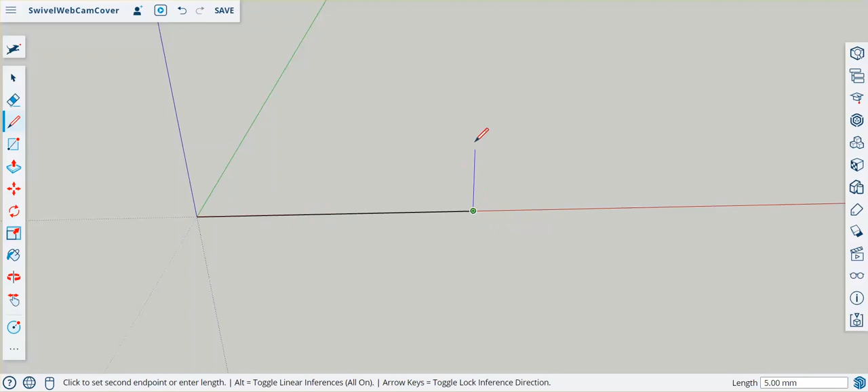We're going to need this today, the fractions of a millimeter. First of all, I'm going to draw a 20 millimeter line on the red axis. I'm then going to go to the green axis, and I'm going to go 10 millimeters that way, come back 20 and back there. So I've got a 20 by 10 rectangle.

Right, half of this rectangle is going to be the swivel I'm going to create. Now I've halved the rectangle into two squares. This first square needs to be raised, and I'm going to raise it up 0.5 of a millimeter, so half a millimeter.

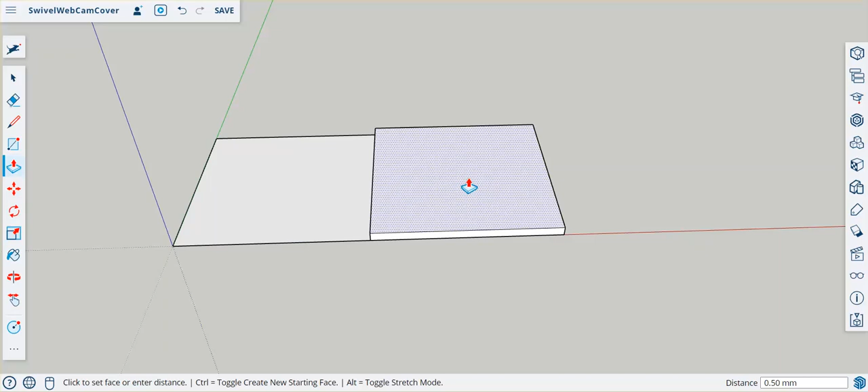Now on top of that half millimeter, we're just going to ignore this side for the moment. On this half millimeter here, we're going to raise a circle. So I need to draw a circle, or raise a column basically. Going to draw across there, go get my circle. Remember, if circle's not showing, look inside the tools.

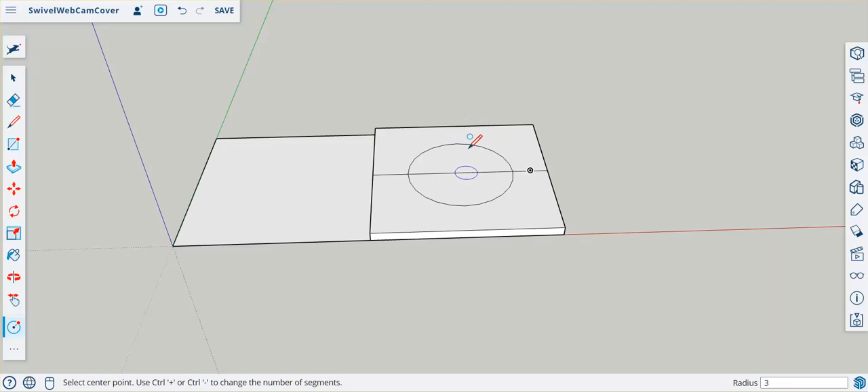Midpoint, circle to the edge is 5 millimeters. I want to have 3 millimeters here. So this is going to be the center of my hinge, and this part's going to revolve around that hinge. I need to use the rubber to rub these parts out.

We're now going to bring this up another, or to the top really, which is going to be about 1.5 millimeters. So let's raise this 1.5. So now from half a millimeter, 1.5, I've got 2 millimeter height to my webcam cover.

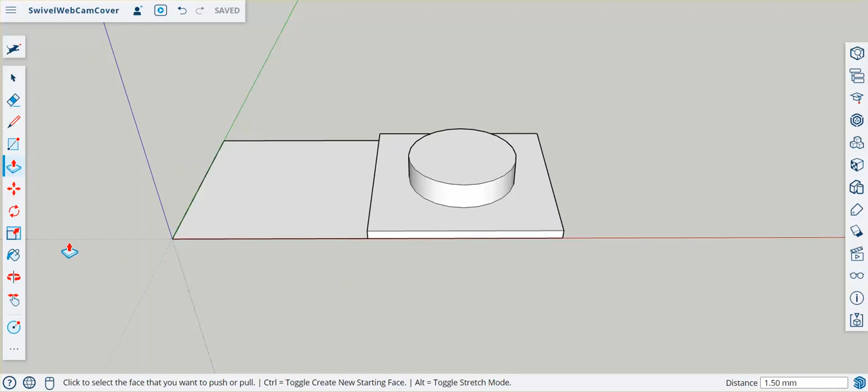The next thing I need is I need the top to be wider. So basically, we're going to use offset, and we'll create some air gaps. We're looking at 0.4 of a millimeter as an air gap, and that's because the printer extruder extrudes at 0.4. Let me just get offset on while I'm telling you this. I'm going to go to offset. What offset does is it lets me take an offset from an edge. So I need a 0.4, just type that in, offset.

That's the same width as the nozzle on your printer probably. If your printer nozzle is 0.3, then it'll be 0.3 there. If it's a 0.5, 0.5, but standard nozzles are 0.4. So that will allow a gap so the extruder won't stick to the edges too much. It'll be a little bit sticky, you'll have to crack it open, but it'll be okay.

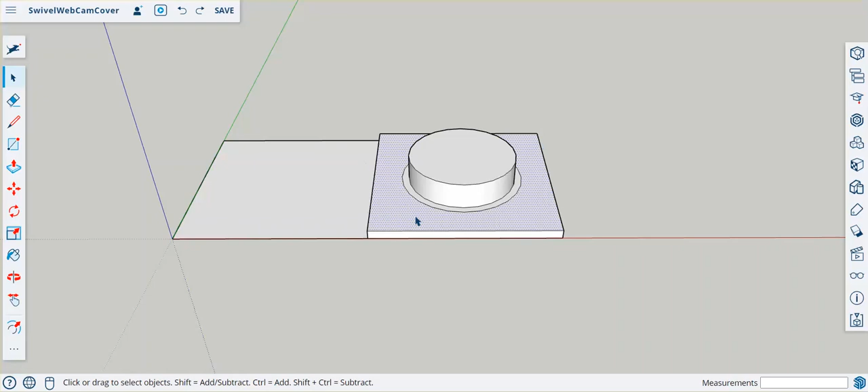So now this air gap is going to flow around. So the base piece here is going to be within that air gap in a minute. Now this at the moment is touching that air gap, so we're going to be a bit sneaky. Oh, that's not it, let's press escape. If you click something and it starts doing something, if you press undo, Control Z, or escape, it'll stop doing it. I want to highlight that, Control C copy, Control V paste, and take it over there.

Just put it over there for a minute. I need to create an air gap now of 0.3 here. So what I'm going to do is take a line, draw a line up on the blue axis, let go of everything. I said 0.3, I meant 0.4. I've now got 0.4 mil there. Press escape, gets rid of the line.

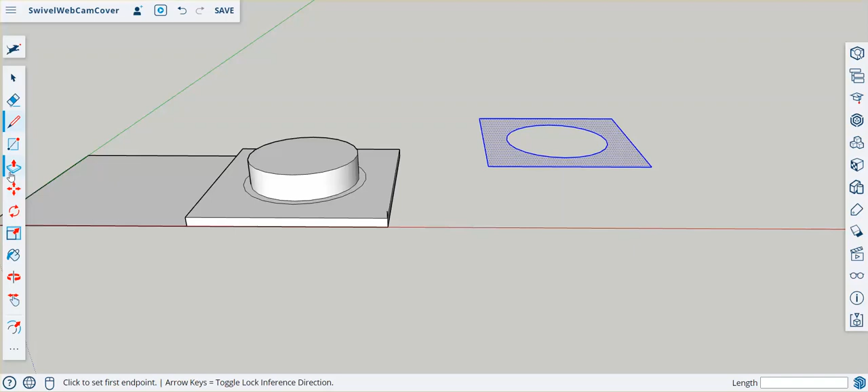I want to put that into that air gap there. So here we go, I'm going to move tool, take this corner, and put it there. I've now got an air gap of 0.4 because of that line I drew. It's going to take the line out. Just be careful doing that, we don't want to lose it.

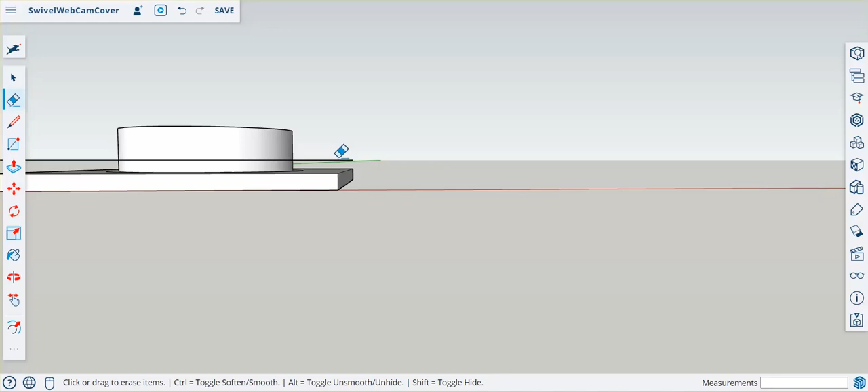And now we're going to look at raising this to create that hinge. Now at the moment I'm at 0.4, so I can take this up a millimeter. Well, actually I'll take it up level to the top because we can sort the top out in a second. I did that by just hovering over the face, so it will take it level with that face. So that's now level in there.

Now I need another offset because I need this bit to overlap, or this is just going to fall off, isn't it? So let's create another circle. That's why we started with 3 mil.

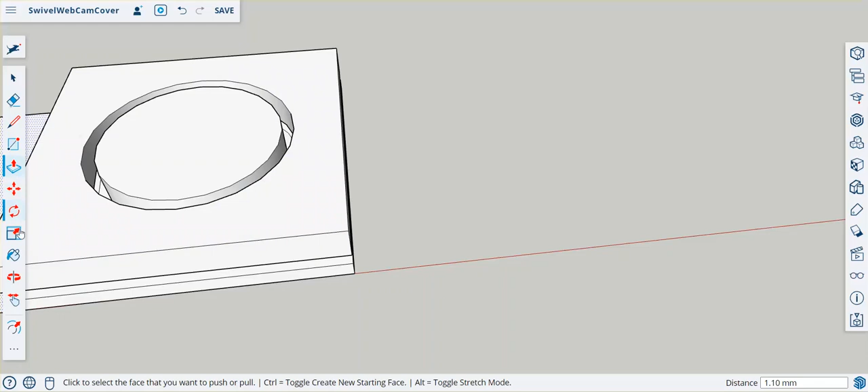So let's go to our offset again, and you can see how powerful offset is here. Let me do it from this point to make it easier. So offset to there is 1.59. I'm just going to have an offset of 1, so that's going to leave me some space around the edge.

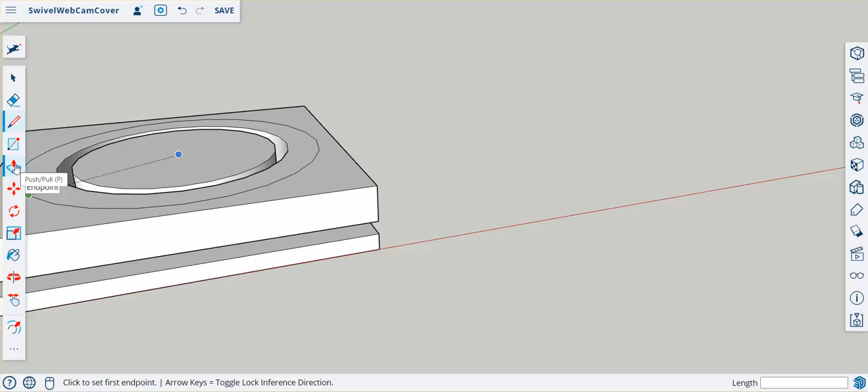And then with my pencil, let's measure the thickness. I should have a thickness here of 1.10. So I'm going to take this down 0.5, but with an extra bit of air gap, so I'm going to take it down 0.9 - that's 5 plus the 0.4 air gap.

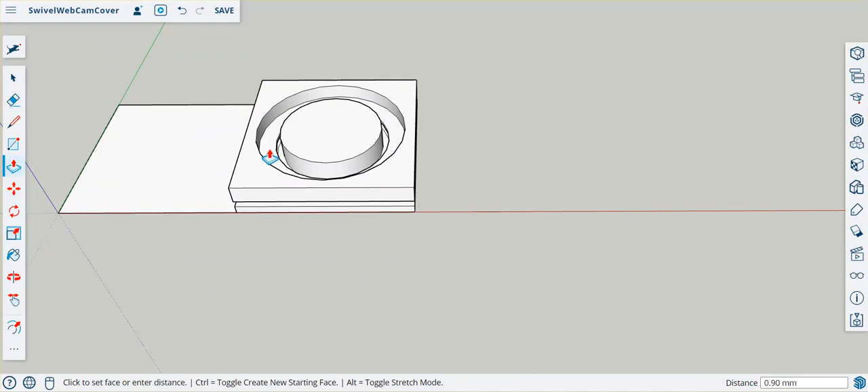Pull down 0.9, enter. I'm just going to hide a side now just to look inside. You don't need to do this, but if I just do hide, you can see there's still quite a lot of model in there, so there'll be enough thickness to hold this together. Back to the glasses, unhide all.

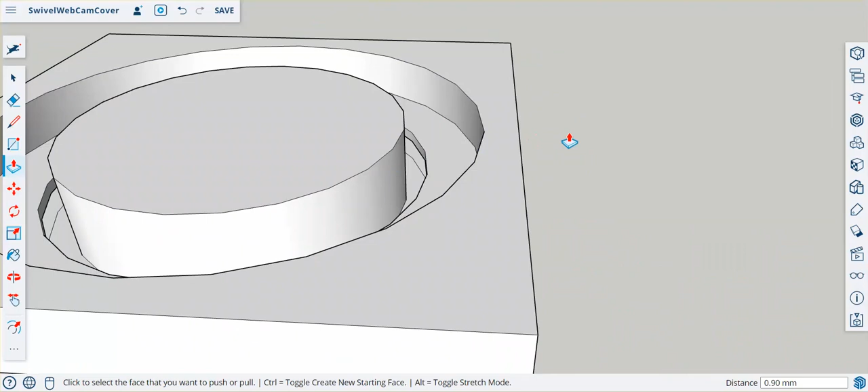Let's get on with the show. So now I've got this recessed air gap, but I need this part to be wider to come in and fill this. Now we're going to use offset again, so I'm going to make sure nothing's clicked. Pointy arrow, click, and then use my offset.

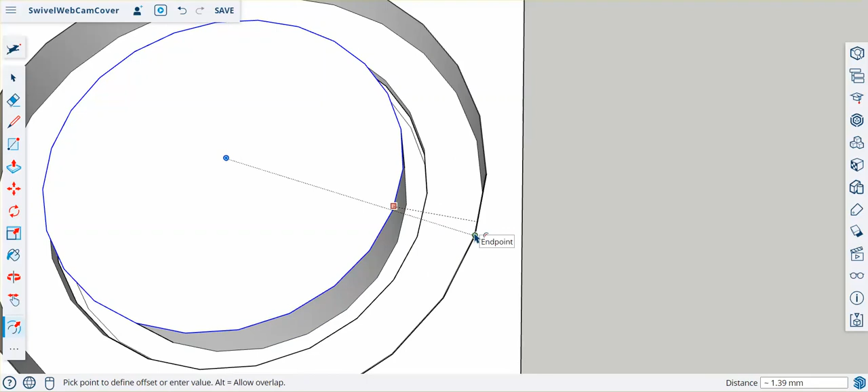There you are. I'm going to take this offset, and from there to there is 1.39. We need a 0.4 - 0.39 is fine, so I'm just going to go to 1 mil, and that's going to give me the air gap there.

Then I need to take this down to the bottom, and again I need to know what's there, so I'm going to do some hiding now just so I can see what I'm doing. I'm going to go to this point here, right click, hide, right click, hide. So now I can see what I want to pull down.

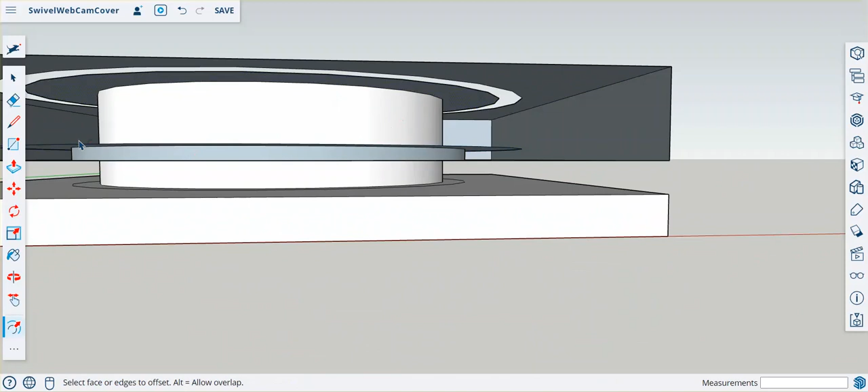Go to my push pull tool, and if I bring that all the way to the face, that's 0.9, but I want a 0.4 air gap, so I'm going to go for 0.5 - 9 take away 4 is 5.

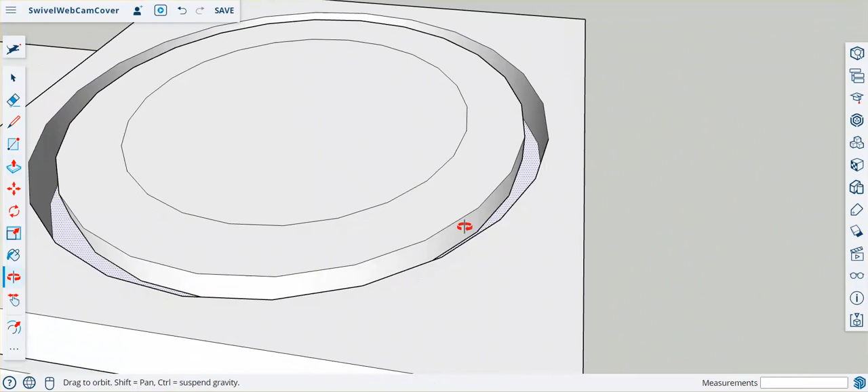And now I can see if I unhide all my parts, I've actually got a recessed thing in there. I don't need that line at the top, so I can get rid of that line. I don't need that original line down here I created, so I can get rid of that.

So now I've got a top which will swivel around this pillar or the hinge, the pivot, whatever you want to call it here. And I need to make the piece that's going to cover the webcam.

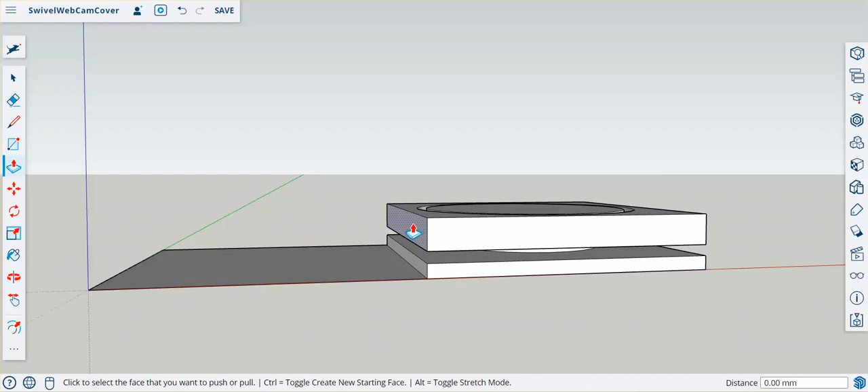So I'm going to use my push pull, and push pull to there. Then to make it look a bit prettier, I'm going to cover over that part there. You can notice here, the bottom has disappeared, so what I'm going to do is just get a line and join this corner to corner.

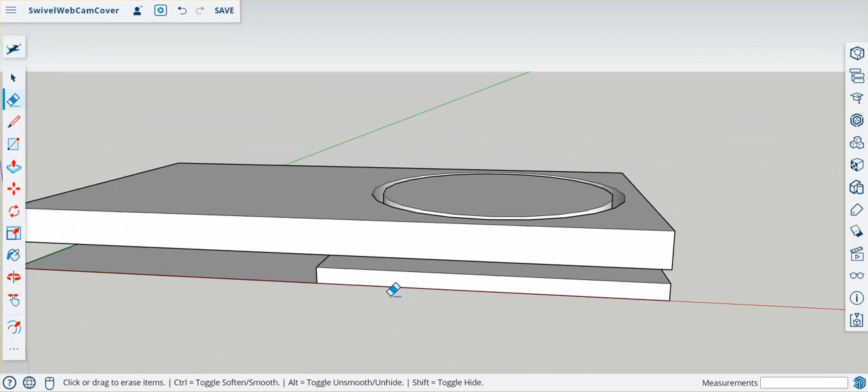You can join it side to side and just rub that line back out, and that's giving me that line back again. I'm just going to check for any grey bits - no grey areas, so we're okay. There's no reversed corners or sides.

So we know, so let's just get rid of this bottom thing because that was my guide to start with. Let's get rid of that. So we know that from there to there is 10 millimeters, and that's going to crash into that at 10 millimeters, isn't it?

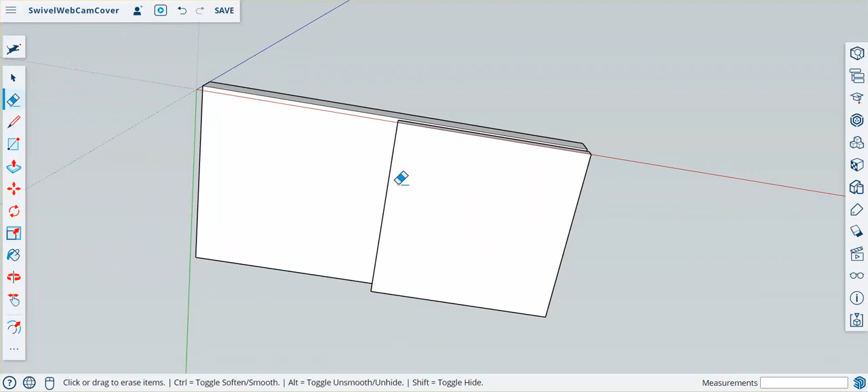So what I need to do is create a bit of a curve, and then from that curve I can sort of make an offset as well. So I need to have another offset inside here, and I'm going to offset. The easiest way to do it is just going to be by hiding this, so I'm going to right click hide, right click hide.

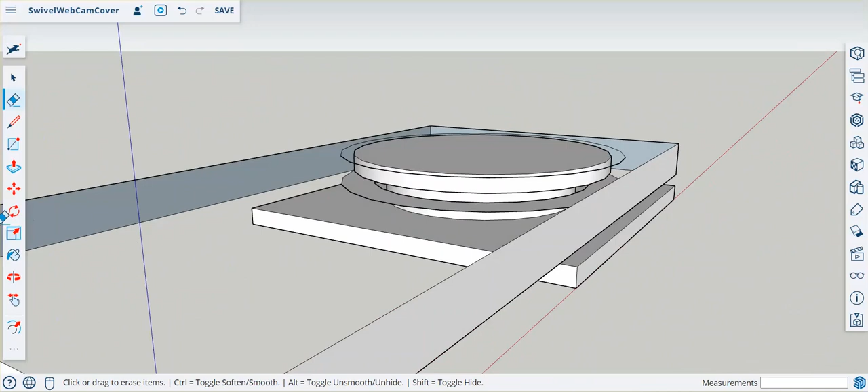I might even just hide that face as well. I've left the lines there so I know that they're there. I want to get that line there and offset it to here to make a curve, you'll see what I mean. So let's go and get the offset tool, pick that line up, but I need to pick it up at the furthest edge and bring it to there - that's going to give me this offset.

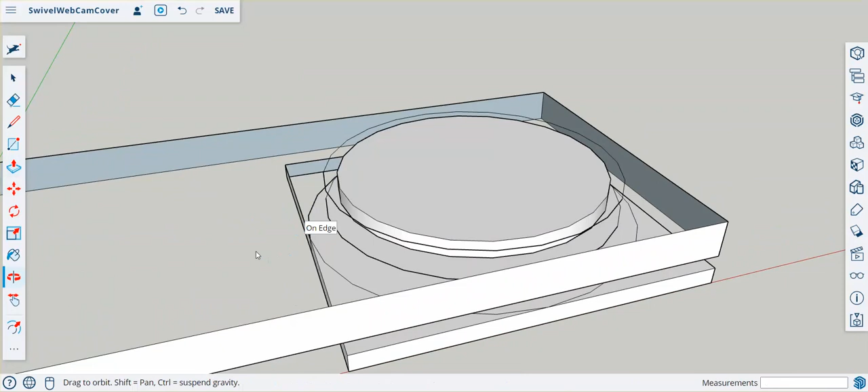I click there. That's now offset quite nicely for me. Now, if I've done it well, it'll allow me to remove these chunks. I'm just going to tidy this up now with the rubber, or eraser, depending what you call it.

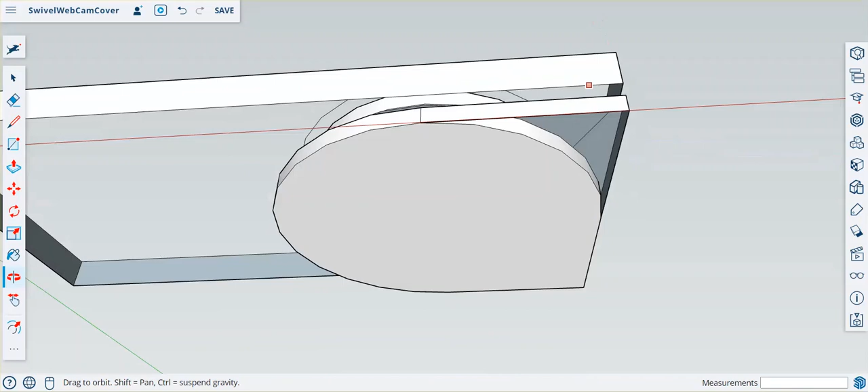There we go. And I just need to fill this back corner back in again. So just draw a line anywhere there, it'll fill in, and it looks like I lost a bit at the bottom. Yeah, I did. A line to there. Right, now I don't need that line, that line, that line. And I don't need that line there. Don't need that one. Don't need that one.

Right, I'm just going to get everything off. So click on the glasses, unhide all. So now I've got a curve for the base, so it'll allow rotation.

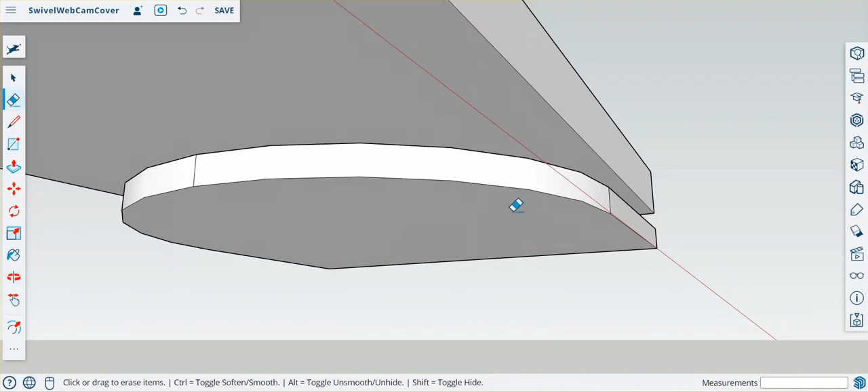Now what I'm going to do is I'm going to be a little bit sneaky. I'm going to use that placement again by highlighting. I've clicked to highlight there. I'm going to control copy and paste.

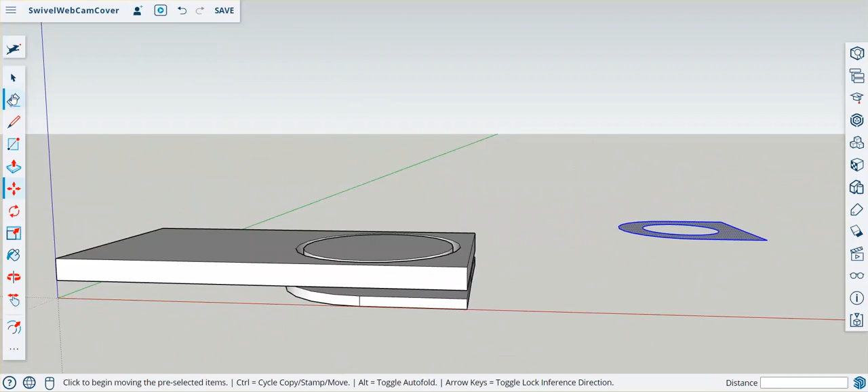I'm then going to take that. Well, actually, what I will do first, I don't actually need to do this, but I'll do it just for a demonstration. I'm going to take that off, so I've just got the line. I'm going to take a triple click to highlight to select all, or I could draw a box around it to select it all.

I'm going to click on the move tool and grab that corner there. Oh, I don't know if we grab the corner. Let's try again. Grab the corner. Yeah. And I'm going to take that corner to this corner.

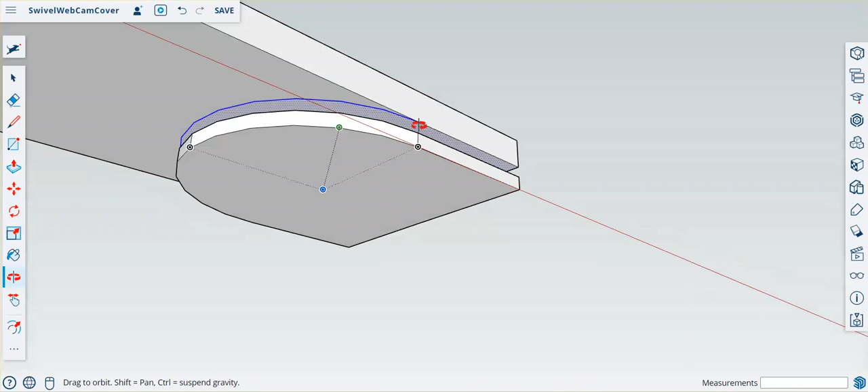That has now laid the exact shape of that. But I need an air gap. Now I need a bigger air gap this time because I don't want this to be really, really close. I need it to have a bit of space really.

So I'm looking at the base here swinging up over the top of this. So let's take a line from there straight out to there.

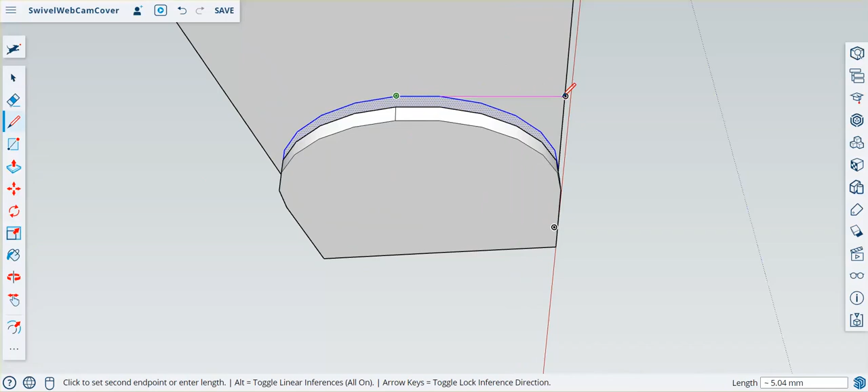So if you imagine that's going to sit on that curve, if I take my rubber and remove that line there, oh it's going to do it in segments, let's get them all. This is touching at the moment.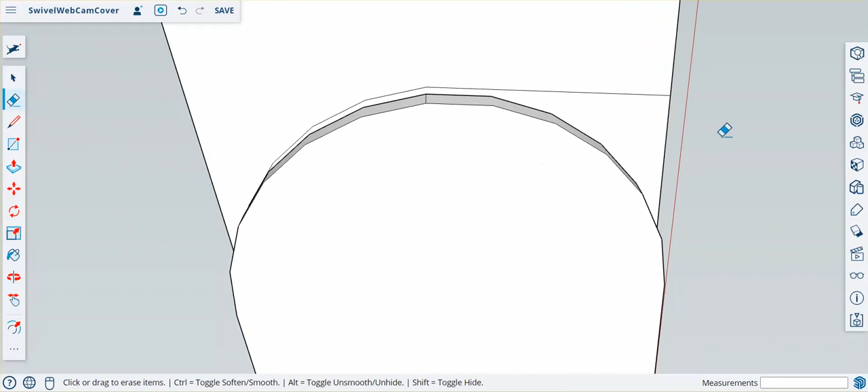So the idea, what I'm going to do is basically grab this and bring it down like so, and you're going to have a nice little sweep, but it's too close, it'll stick. So let's just escape and do that.

We need to use the offset tool again to create a bit more of a line, but the offset tool, when we use this, is going to offset the whole border. You'll see what I mean. So if I offset that, see here we've got like the whole border.

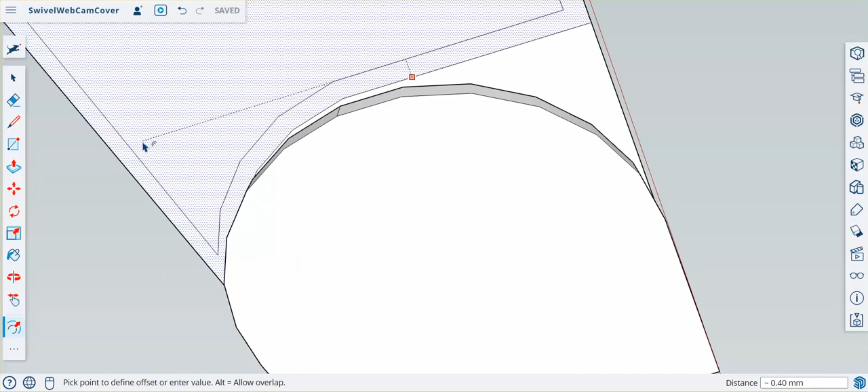That's not a problem, but we need a decent gap here. 0.5. There we go. I'm going to draw a line there. I've got to remember this is going to be underneath, so it's not going to be seen really. And I'm going to put that. I'll put that over there.

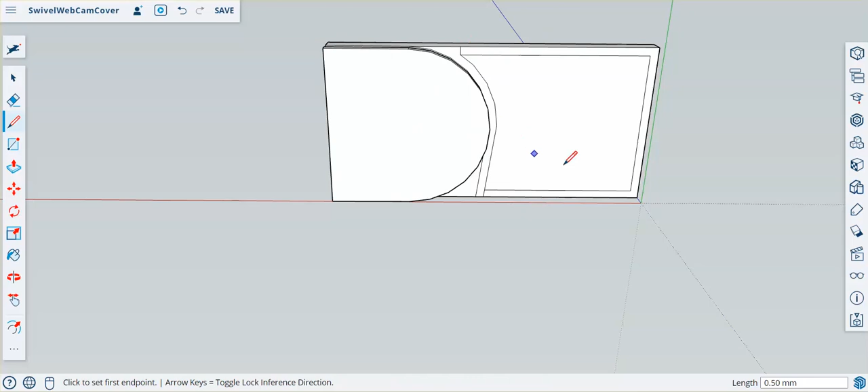In fact, I won't do that because that might catch on the back end over here. So I'll do this instead. Right, now I'm going to take away, missed.

I'm going to take away that line, and that line, and I don't need that line there anymore. And then I'm going to pull this, oh, there's a big line there as well, I don't need that line there. Going to get hold of this, and then go level with the base. And it's dropped the line there.

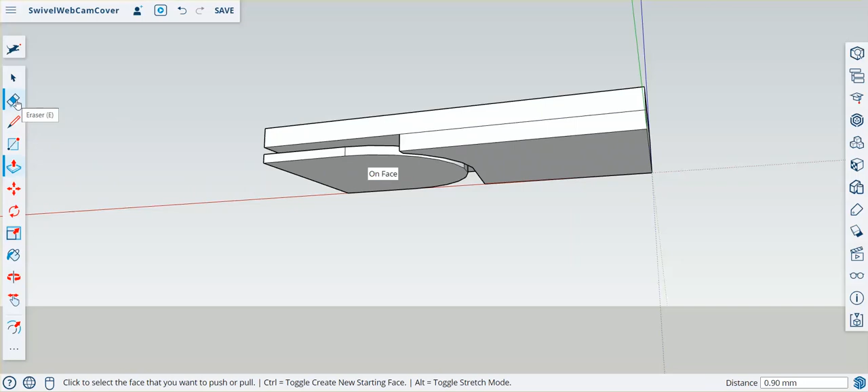Oh, it does need that line there. Doesn't look like it needs that line either, but it might want it. It does. So I'll just leave it there. Right, we've now got our pivot.

So what should happen is when we print this out, we should get the ability to lift this up and put it back again. But this hinge will hold itself. Let's get it on the printer and find out.

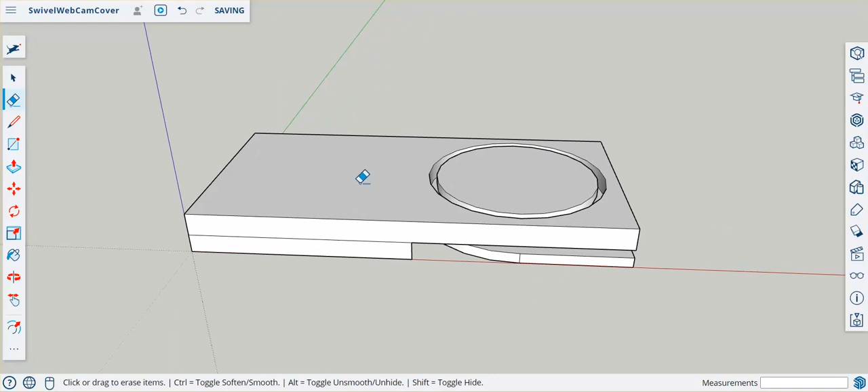So I'm just going to save that. I'm going to purge to get rid of any of the additional bits. Let's just have a quick look inside actually before we do. Hide the top. No, there's no additional lines that we didn't need.

Great. Glasses. Unhide all. Right, let's take an STL. Download STL. And we'll take that STL over to the slicer.